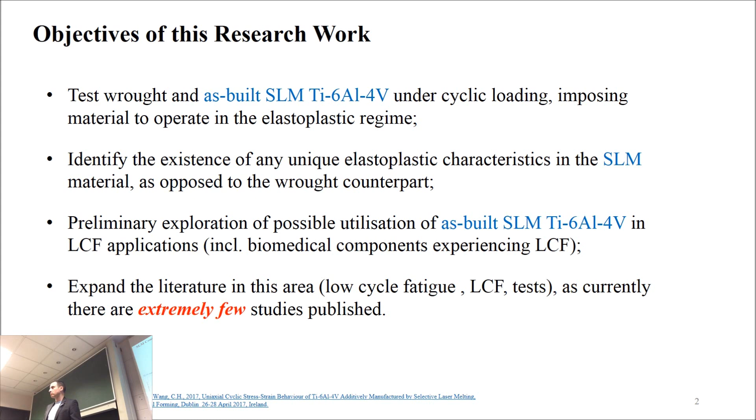What we did is get some samples out of the SLM machine and try to compare them with the typical behavior of wrought metal.

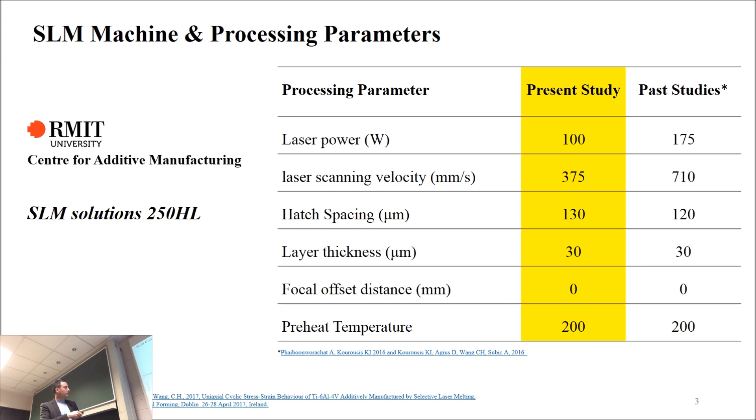First we looked at the microstructure. The objective of this research was not to fully characterize the microstructure, but rather to identify the macroscopic response under stress and strain. What came out of some preliminary SEM analysis is that this is not the typical wrought metal microstructure. We have seen the alpha acicular martensite structure very evidently, and the titanium 64 is heavily in the alpha microstructure regime rather than the typical wrought metal.

Before doing any cyclic tests, we did some monotonic tests. We couldn't rely on tests done in the past by other researchers, either within the university or other universities, so we tested the wrought metal, the typical mill annealed wrought metal obtained from the market, and the SLM produced metal.

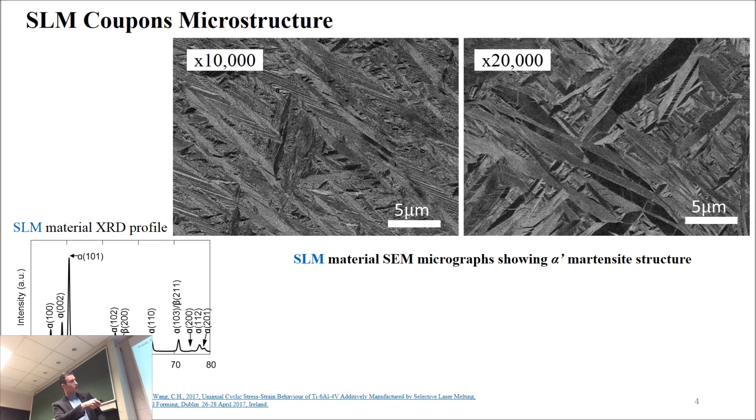What we have seen is that both exhibit very similar behavior in terms of the ratio of ultimate stress to yield stress. This is important, because this ratio shows the capacity of the material to predict whether it can undergo cyclic softening or cyclic hardening. Any value below 1.2 means the material is likely to undergo cyclic softening.

In terms of the tests, we did strain control tests, displacement control, and two different kinds of tests: symmetric tests and asymmetric tests. The symmetric tests are the typical step loaded tests, where we impose the material to different strain levels under symmetric load, from 1%, 1.5%, 1.8% and 2%. For each strain level, we did 80 cycles.

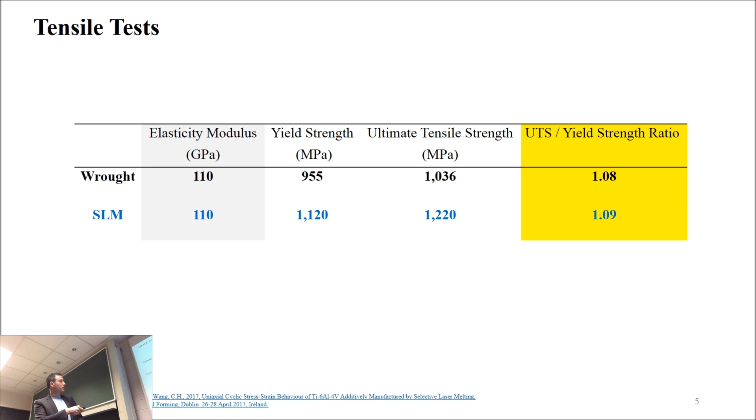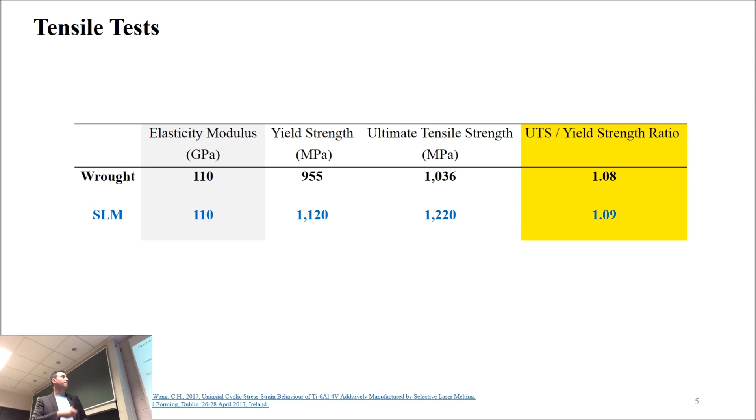Another set of tests we did was asymmetric tests, where we wanted to see some other behavior, as I'm going to explain. We did 4 different tests under a combination of mean strain and strain amplitude. We kept the strain amplitude constant and varied the mean strain. For this kind of test, we did 150 cycles, because we thought the material had the capacity to undergo this level of stressing without premature failure.

In terms of the symmetric tests, again, we're talking about the step test. At each strain level, we complete 80 cycles, then move to the next level, until we get either a failure or the prescribed number of cycles, in this case 80 cycles. The left graph shows the first cycle of this sequence for each of the 4 different strain ranges, and the right one shows the last cycle, the 80th cycle, both for the wrought metal and the SLM metal.

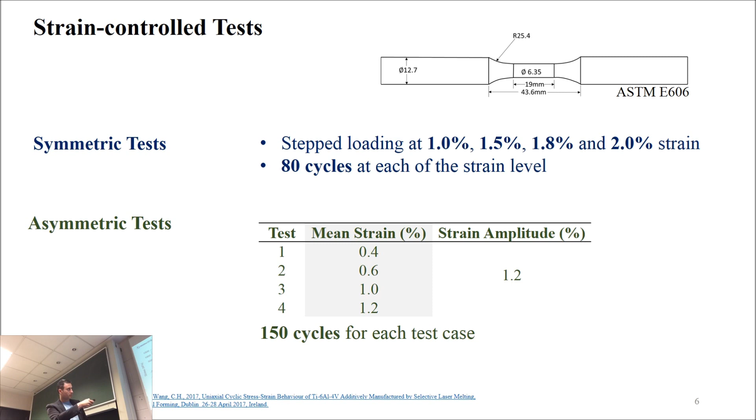So the wrought is the black line and the SLM is the blue line. If someone would like to see it more evidently, because this is a rather confusing graph, as always, we have seen that in the literature, but it's not ideal if you'd like to have a better look.

So what we did is we decomposed this array of different hysteresis loops to each one for each strain level. Here we see, for example, at 1% strain level, the last cycle, and so on. What evidently comes out of these strain curves is that the SLM material has less capacity to undergo plastic deformation.

In terms of the asymmetric tests, here we have 4 different tests, as I mentioned earlier. Test 1 means that we do a mean strain test at 0.4 and a strain amplitude of 1.2, and so on. So we change the mean strain and keep the strain amplitude constant.

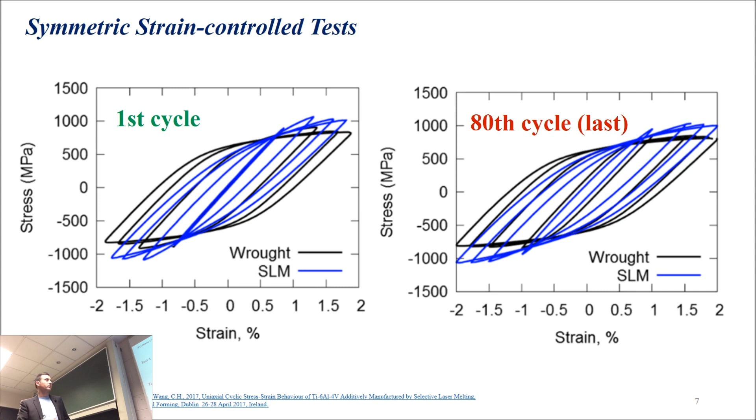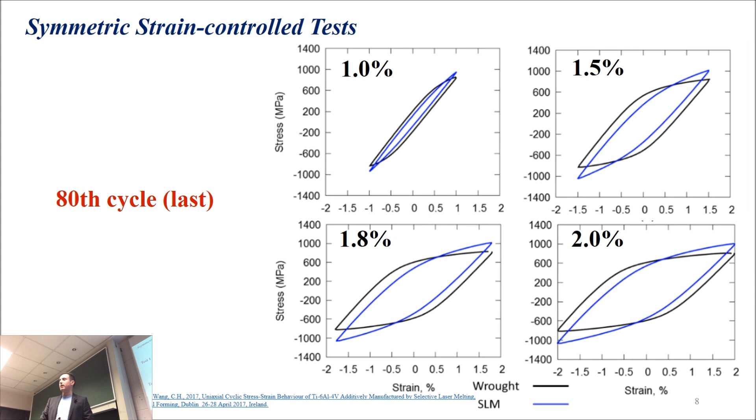Another thing which was interesting to examine is how quickly the SLM material and the wrought material are relaxing stresses under the asymmetric tests. Stress relaxation is important for fatigue applications, because in practice someone would like a material that exhibits fast relaxation, and that way you can achieve better high cycle fatigue.

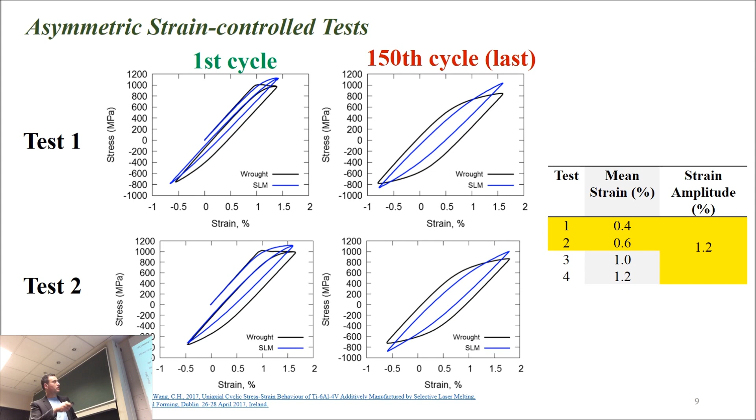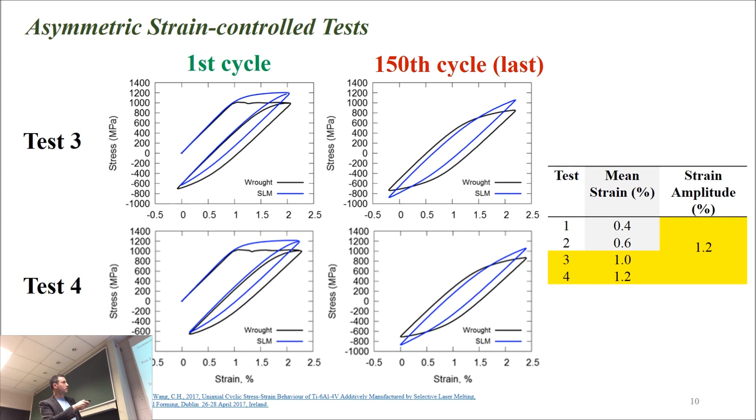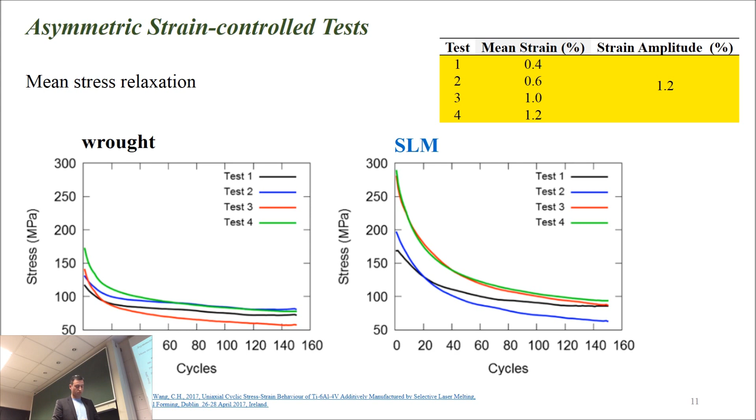Another thing we observe is how quickly these residual stresses are relaxing for the SLM material compared to the wrought metal. This is an indication that, at least with these preliminary results we obtained, this material is highly likely to perform much better under low cycle fatigue.

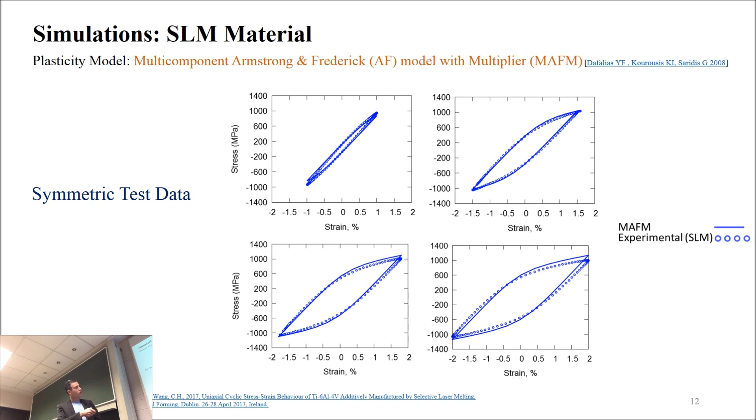Some complementary work trying to simulate these results. We have been using some models, trying to identify the best possible model available in the literature to simulate these results. We used one of the models which has been used in the past for other metals, both for simulating symmetric test data and asymmetric test data, and we found there is very good agreement in that regard. This is helpful for simulation purposes without having someone reinvent or modify an existing model.

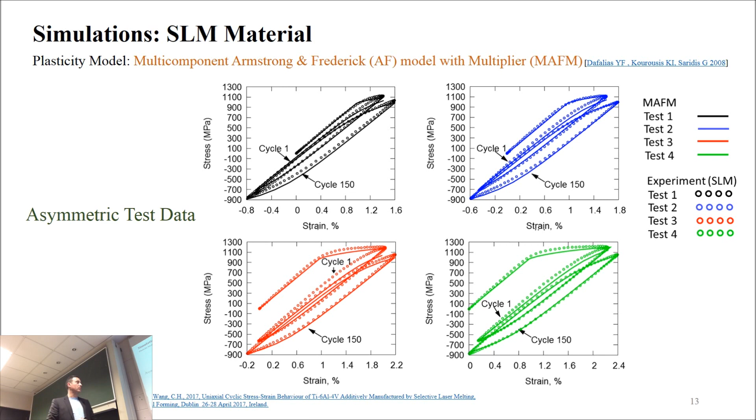So the SLM material seems that it has - this is, let's say, accommodating in that regard.

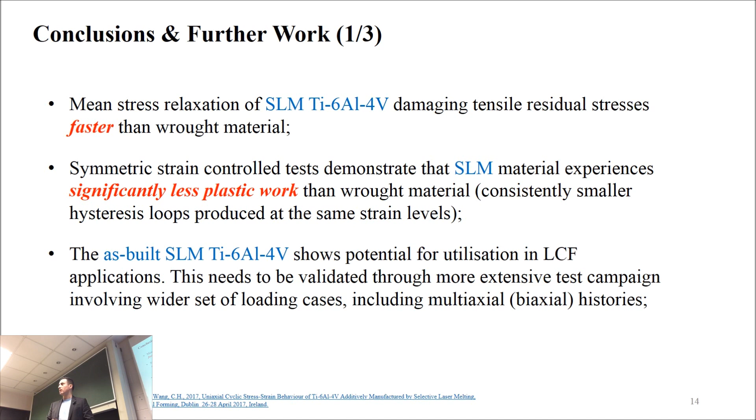In conclusion, as I mentioned, the mean stress relaxation is happening faster for the SLM material. Less plastic work happens on the SLM material, meaning it is much less ductile, and this goes back to the microstructure. This needs more investigation, but so far it means we have the potential to utilize this material for LCF applications, for low cycle fatigue applications, if defects are not present, and this is something we almost always get out of the SLM process.

The transient behavior under cyclic loading can be simulated accurately with the models we have tested, and this can be very useful for high cycle fatigue calculation, where strain-based methodologies are used.

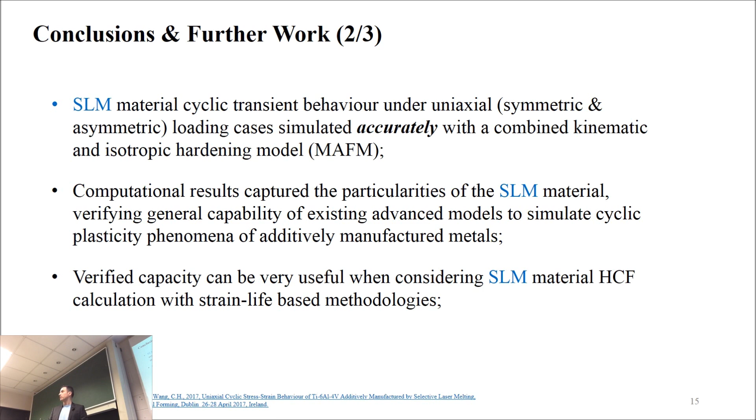Of course, we have more work to do, and we're currently doing this work at RMIT University and the University of Limerick as well, in conjunction with the Defence Science and Technology Organization in Australia.

First of all, we need to look deeper into the microstructure. Secondly, anisotropy - not only anisotropy from the point of view of monotonic loadings, but also from the point of view of cyclic loadings.

So we already have under review, it's the same paper in practice, which reports these two findings. Unfortunately, I'm not able to disclose this at this point. There may be a reviewer here.